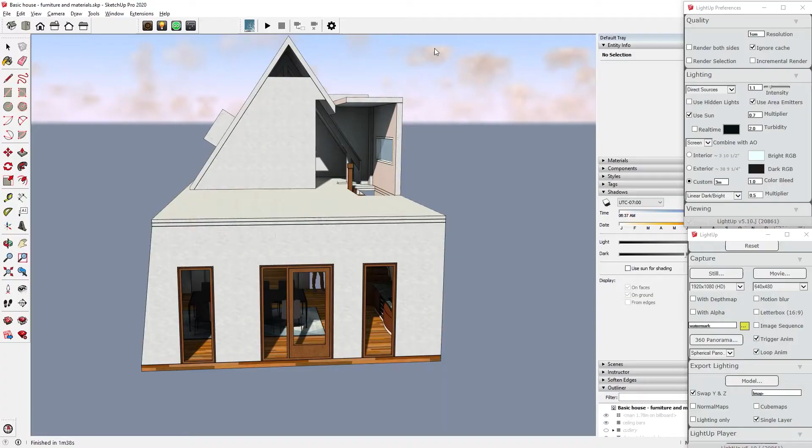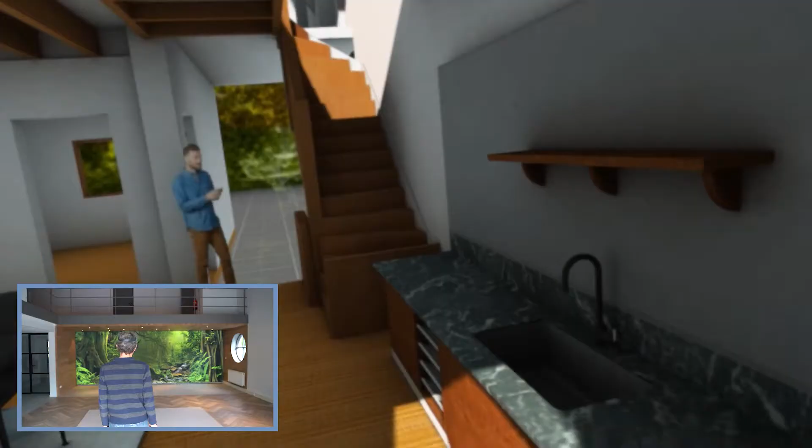In our first VR tutorial, we saw how you can add realistic lighting and shadowing to a model of a house in SketchUp. We then uploaded it to Sketchfab, a 3D model sharing website with a VR viewing option built in. So with a wireless VR headset like the Oculus Quest, you can walk through your room design and get an impression of its space.

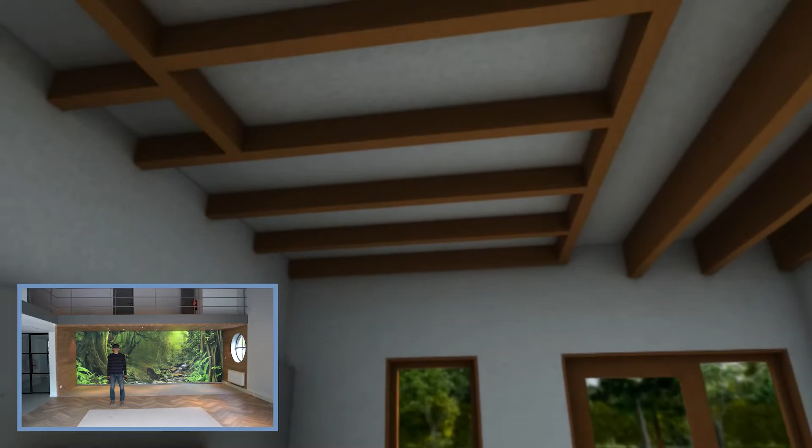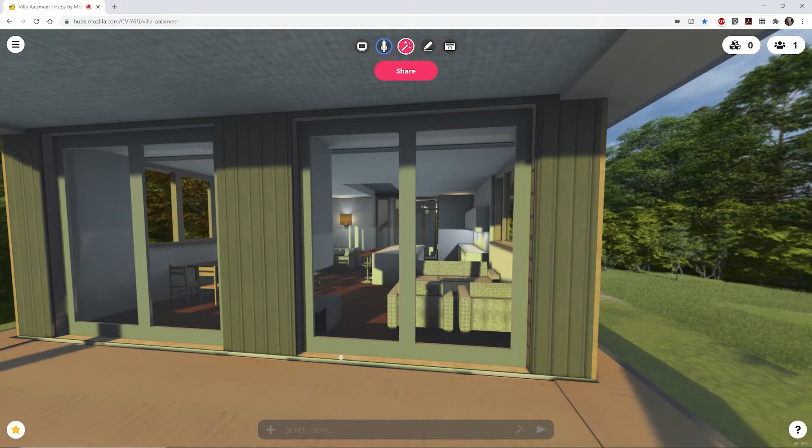To work with larger 3D models, like the ones created using BIM software such as Revit and ArchiCAD, we'll need a different tool to bring them into VR, as Sketchfab's VR performance is too slow for larger models. In this tutorial, we will introduce another free web-based VR system called Mozilla Hubs, which can better process larger models. We will also show you some light mapping techniques that are needed for these larger and more complex 3D CAD models.

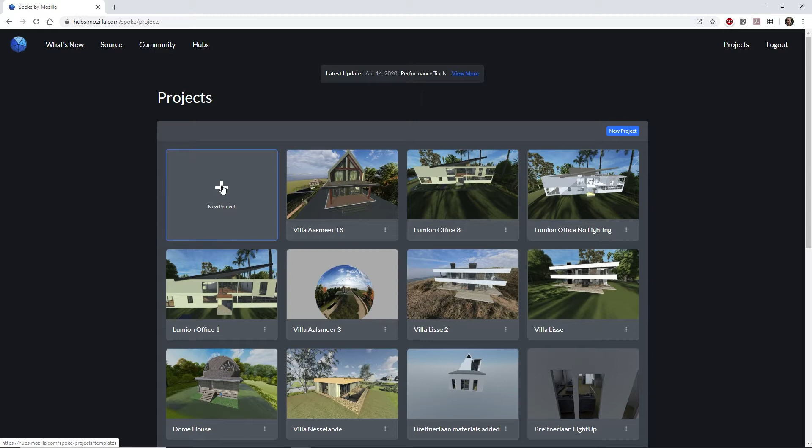Once we're in, let's start a new project. In Mozilla, you start with a default environment called Crater. You can delete this environment by clicking it and using the delete key.

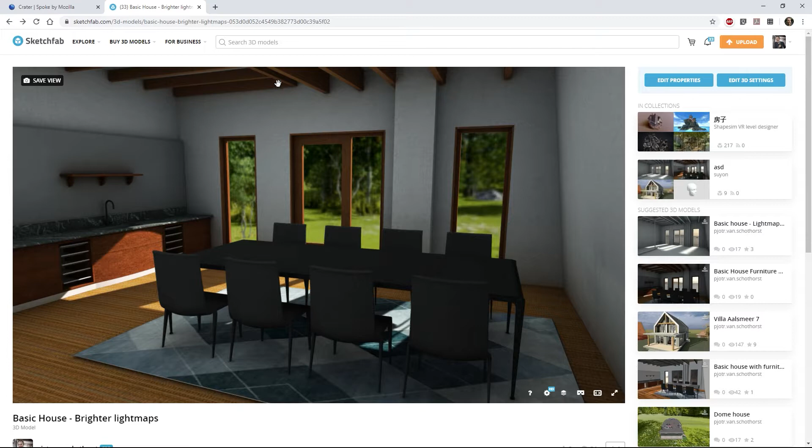Add a new model to the scene by dragging and dropping a model item into the viewport window. You can see at the bottom right-hand corner of the screen, the default model object has a URL associated with it. Delete this URL, as we're going to paste the URL of the house we made earlier in Sketchfab. Any object that you configured as downloadable in Sketchfab can be brought into the Spoke editor in this way.

We can't see the model at first because its size was set to a default of 0.01. Let's set the size to 1.

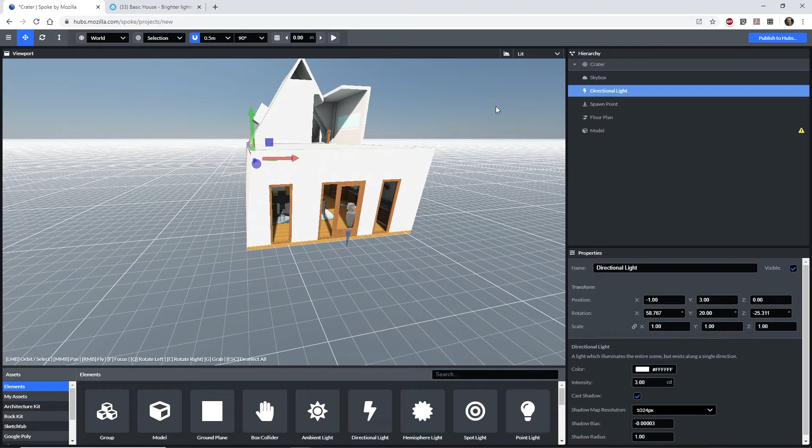In the top right section, you can see all the items that are part of the default new project. Since our house has its lighting baked into its textures, we can delete the directional light and add a hemisphere light. This will light up the scene more evenly.

Let's rename the project to Basic House. We can go ahead and publish our new project.

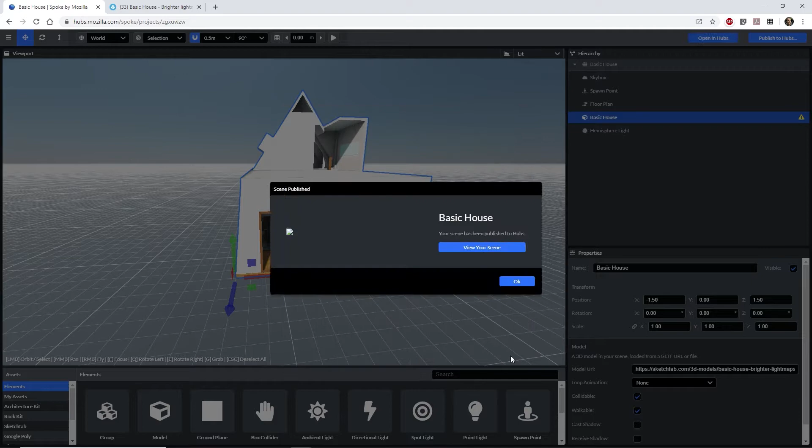All right, our project is published and we can now view the scene. Let's create an online meeting room within this scene and call it Basic House 1. Click to enter the room.

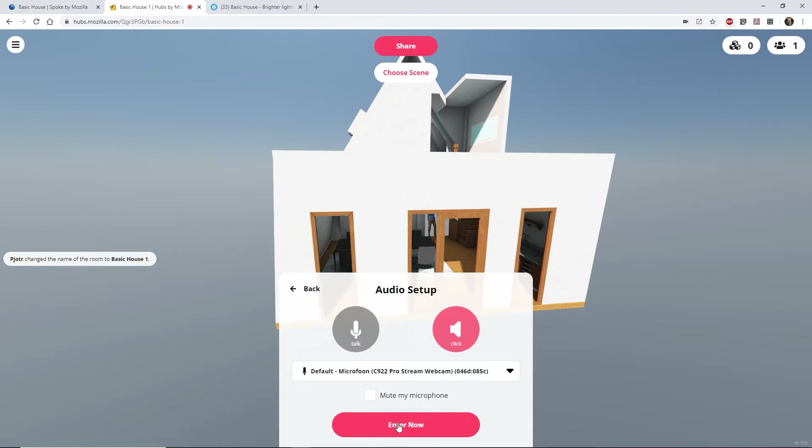In principle, everything is ready for our VR headset, but to improve the experience, there are several tweaks we're going to do first. We'll show you these in a bit.

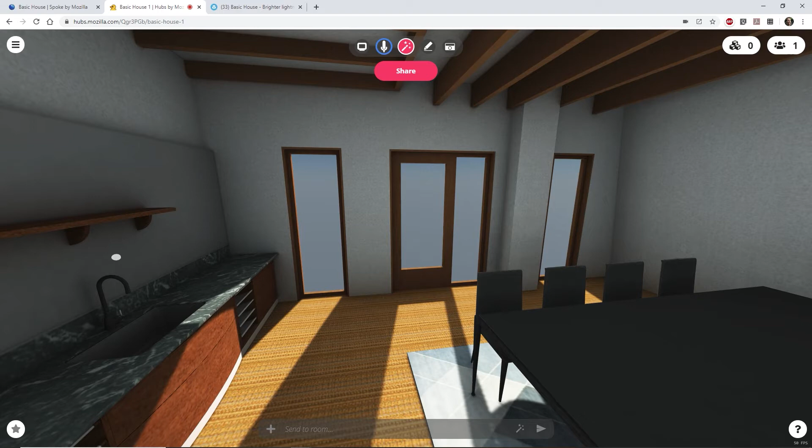First, let's take a look around our scene. Moving through the scene is like a first-person video game. This means that you can navigate using the W, A, S, and D keys, or the arrow keys if you prefer, combined with the mouse.

Holding the left mouse button lets you rotate and look around, while clicking the right mouse button instantly teleports you to the spot where you clicked. You can also invite other people to join you and check out the project.

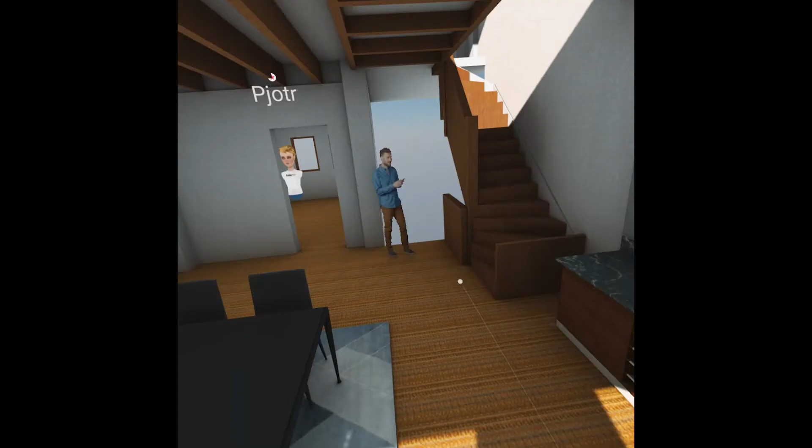All they need to do is use the project's unique URL or temporary code in a browser, including the browser that you access inside a VR headset like the Oculus Quest. When another person enters the room, you'll see them added to the group icon at the top right corner. If the person entering the room is wearing a VR headset, you'll also see their hands, which correspond to the headset's controllers. Now then, with that quick tour done, let's improve our experience while in VR.

Here's a view that we recorded while using the headset. The first thing that you might notice is that our eye level is too high. You can tell that the eye level is too high because when you try to touch the ground with the controllers, you'll see that you can't actually reach it. It almost looks as if we're on an invisible ground plane that is floating above the visible floor level.

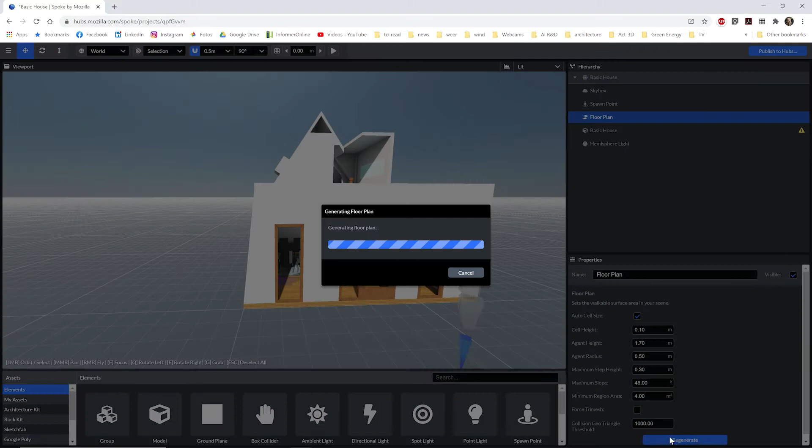To understand why this is happening, we need to go back to the Spoke editor. And if you look at the model properties at the bottom right, just below the URL, we can see that our model has the options of collidable and walkable. These settings will be very important moving forward. Click on the floor plan from the hierarchy list on the right. Then on the bottom right, click Regenerate. This will show the area where we can walk, as well as the objects that we can collide with while walking through the VR scene.

These yellow lines show the collision boundaries throughout the house. This is called a collision mesh, and it was created from the objects in the scene that have the walkable and collidable options active in their properties. Another option is agent height, which you can set to your own height and eye level. The default collision mesh for our scene looks okay at first glance. Let's click on the Regenerate button. This is something you need to do whenever you make a change in the properties or when you set a mesh to be collidable or walkable.

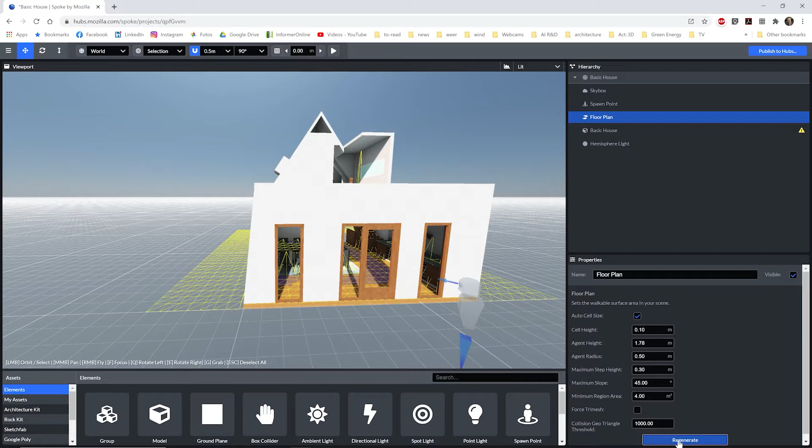Upon closer inspection, we can see a blue transparent plane floating above the yellow lines on the floor, which seems to correspond with the floor level of the real-life room that you experience when walking in it with a VR headset. There's no way to lower this plane, but we can get around this problem if we generate the floor plan's collision mesh with an invisible copy of the house shifted 40 centimeters lower, in combination with a visible copy of the house that will have the options walkable and collidable turned off.

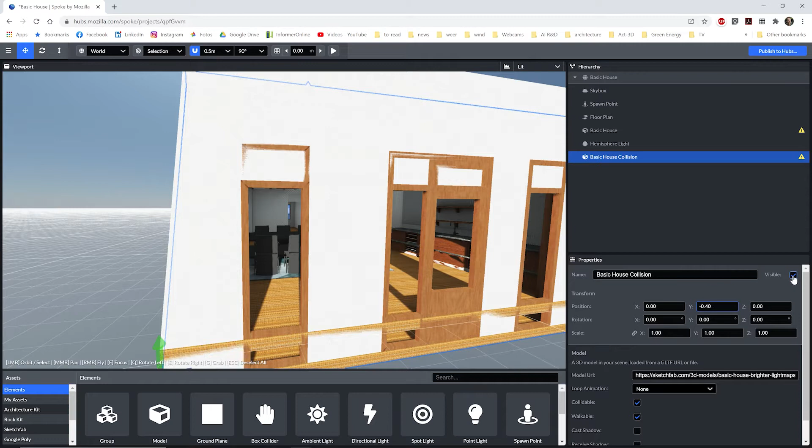The exact difference between the visible house and its collision mesh can differ based on the house design, and trial and error is often the best way to determine this number. It is also based on the accuracy of the boundary area height set by the Oculus Quest. To create the invisible and visible copies of the houses, let's add another model item into the viewport, and we'll give one of the houses a y-axis of minus 0.40, while the other house's y-axis will be 0. For the lower copy of the house, we'll keep the collidable and walkable options on, but then uncheck the visibility box. We'll set the house model at the higher position to visible, and we'll turn off the walkable and collidable options.

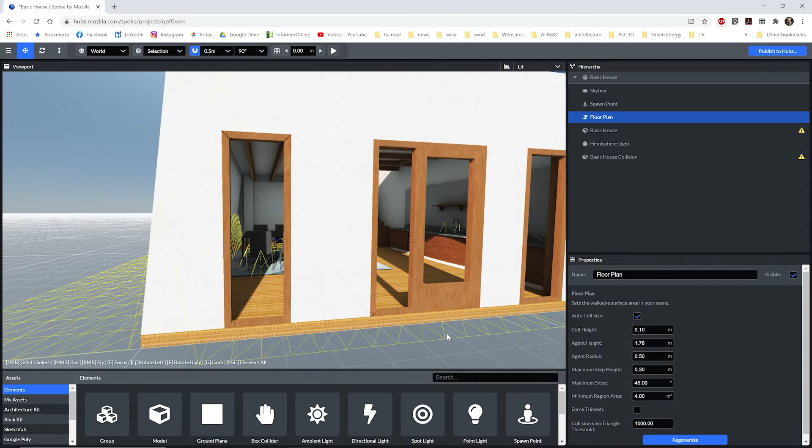Another way of achieving the same goal would be to add a simple custom-made object into the project. For example, you can make an object with only the house's floors and stairs using your 3D modeling tool. And when you add the object to this project, it should be the only object with walkable and collidable options turned on. This will not only improve the performance of the VR experience, but it will also make it easier for people to walk through the house without bumping into furniture objects.

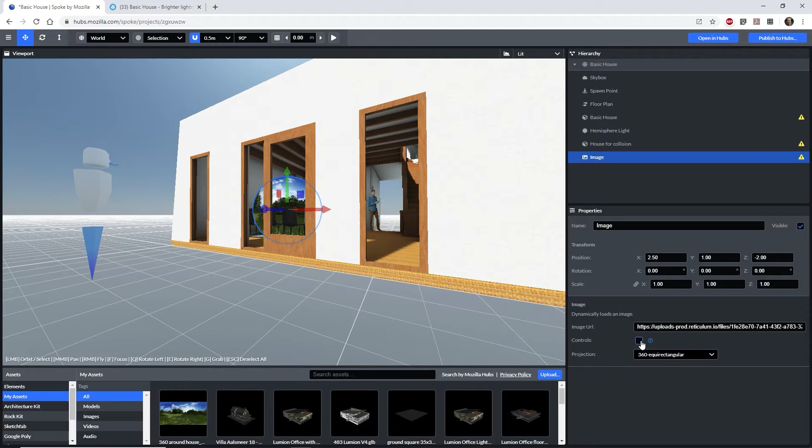Now that our height is set, another thing we're missing in the scene is a nice looking background. Luckily, we can create one quite easily by dragging a 360-degree image into the scene. To do this, untick the Controls option and set the projection to 360 equirectangular. Increase the size to 50 and rotate it so that it fits better with the light and shadows in the house. And lastly, we're going to want to walk around the house, so let's add a ground plane that's wider than the building's exterior walls.

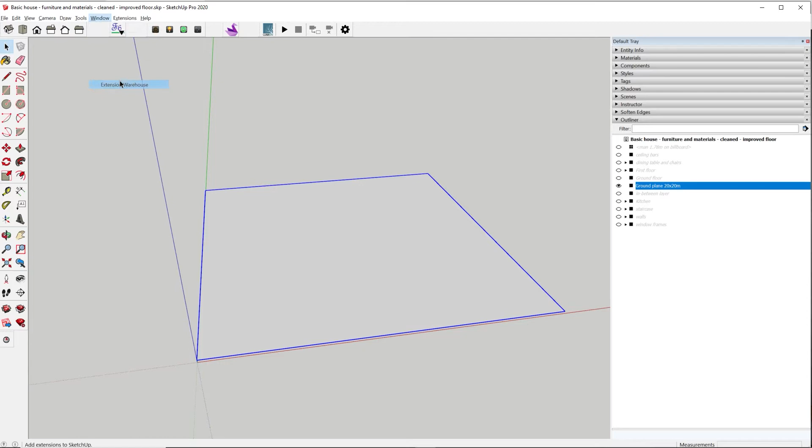We'll first need to go back to SketchUp and create a plane that's around 20 meters by 20 meters. Make sure to save the plane in a GLB file format, a relatively new file format seen as a successor of Collada. While GLB files are not widely used in the CAD industry, it is the only 3D format supported by the Spoke editor in Mozilla Hubs. So in SketchUp, you will need the GLB export plugin that's available in the SketchUp extension warehouse. You can find a link for this plugin in the video description.

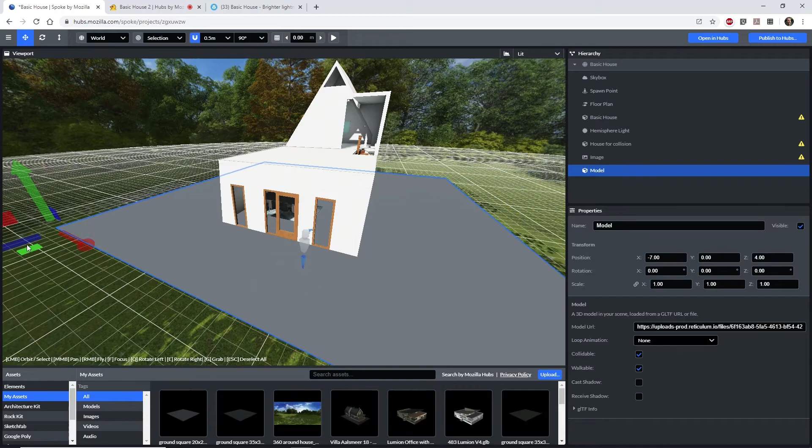Once you have the square plane saved as a GLB file, simply drag it into the Spoke editor. It will appear in the section My Assets and in the Scene Viewport. We will use this square plane as a collision object. To show a nicer ground plane, instead of this blander gray, we rendered a top view image of a meadow in Lumion, saved as a PNG file. We then used Photoshop to fade the image's edges and dragged it into the scene.

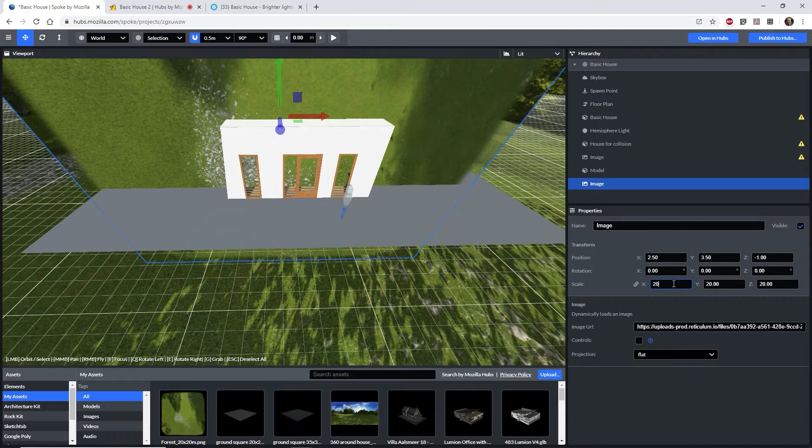Untick the Controls option, keep the projection flat, increase the size to 20, and rotate its x-axis to -90 degrees. Finally, align the image to our newly added square plane. Select the square plane again, adjust the y-axis down by 30 centimeters, and set it to invisible. Regenerate the floor plan and publish the project again.

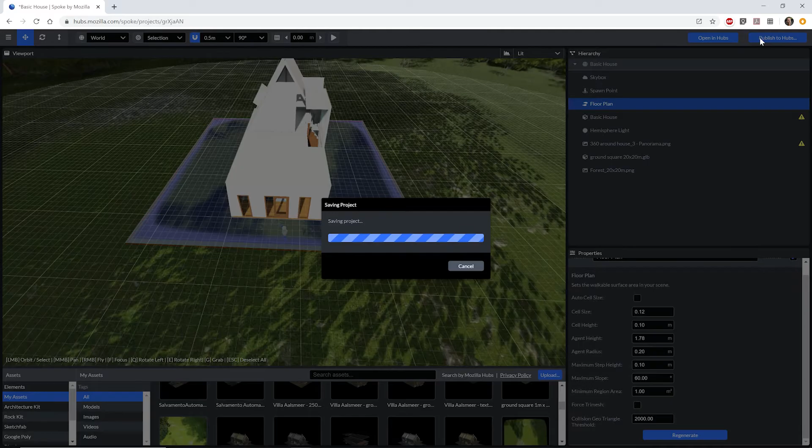Now, when we enter the room, our eye level looks a lot better. We're no longer floating in the air, and we can touch the floor with the VR controllers. They actually seem to touch the ground.

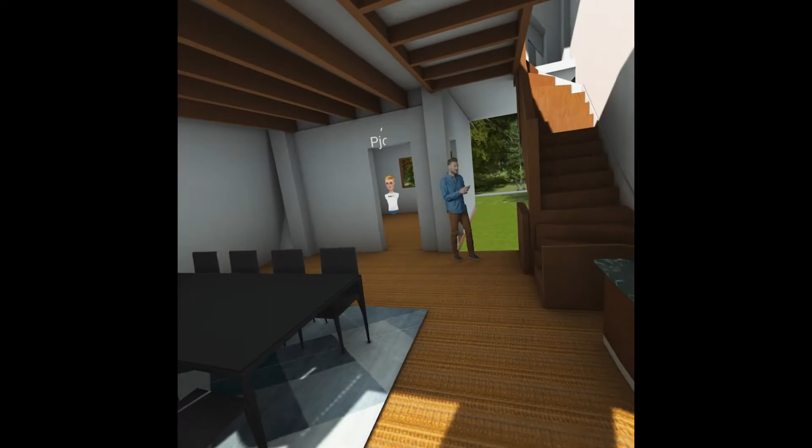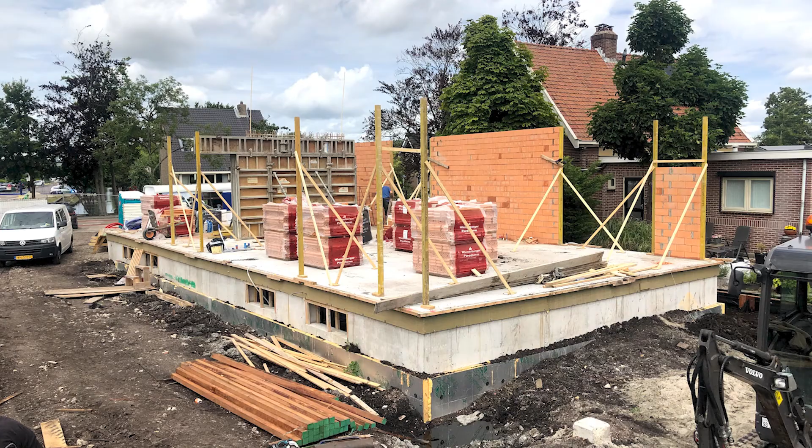With these tweaks out of the way, we're going to move on to a more interesting and complex CAD design. This house was designed by Dutch architect Paul Spaltman, and it's being constructed right now at the time of making this tutorial. Paul used ArchiCAD to design the house and later exported it to SketchUp. Let's have a look at the model as is, and without lighting from the LightUp plugin.

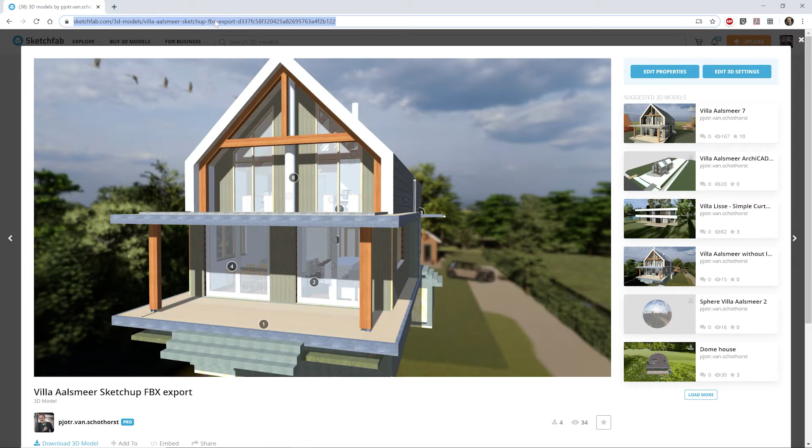And because it seems the GLB file exporter doesn't work very well with Pjotr's model, we're going to first export it to Sketchfab, set it to downloadable, and then get it into the Spoke editor using the same method we used with the basic house earlier in this tutorial. Here's the house in Mozilla Hubs. Without any lighting, the house doesn't look very attractive, and so that's where we're going to start.

Back in SketchUp, we can see that the model has some useful layers, or tags as they're now called, as well as a large number of unnamed groups in the SketchUp outliner. Because the LightUp plugin uses groups to create light map textures, we need to create meaningful groups manually.

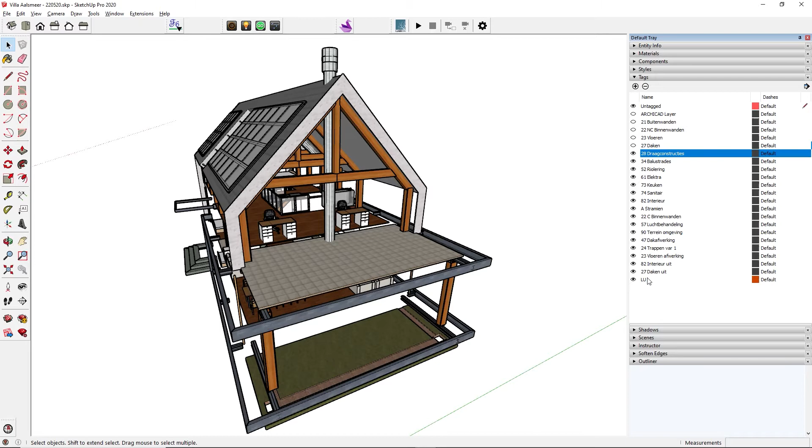We also need to delete all doors to make the house easier to walk through, and delete all transparent surfaces as they can lead to strange visual effects in the walkthrough version of the house. This may feel like a daunting task, but it only took 23 minutes for this specific house design. Here are the groups that we created for this house. Now, let's light it up with the LightUp plugin.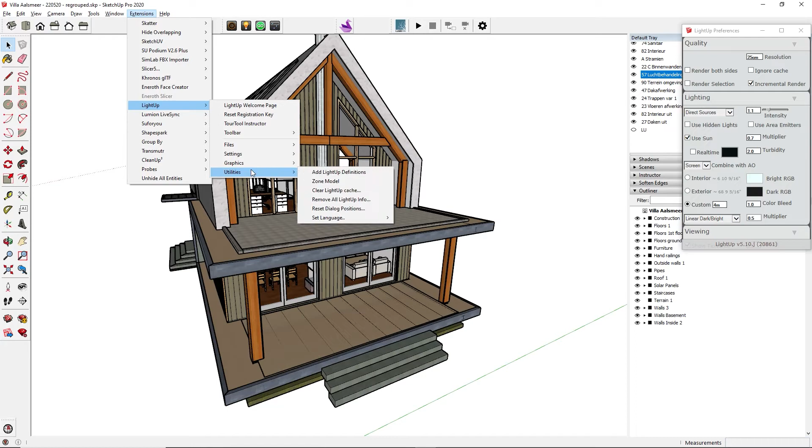On our first try, we didn't really get what we expected, so we cleared the LightUp cache, removed all LightUp info, and exited SketchUp while LightUp was still active. Back in SketchUp, we clicked on Go in the LightUp plugin, and now the lighting looked a lot better. Remember, after a hard reboot of LightUp, you'll need to choose the right render settings again in the LightUp preferences: ignore cache, use sun, not real time, and custom 3 meters.

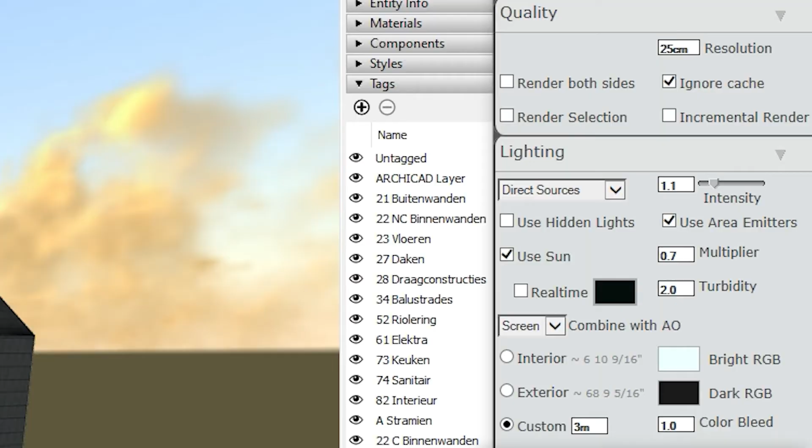Once we see the better lighting when rendering at a 25 centimeter resolution, we can then render it at 1 centimeter resolution to get a lot more detail. And thanks to the low sun position, the main rooms are really nicely lit. But over here, we can see that the bedrooms and the basement are too dark. There also appears to be some missing walls and ceilings in the basement.

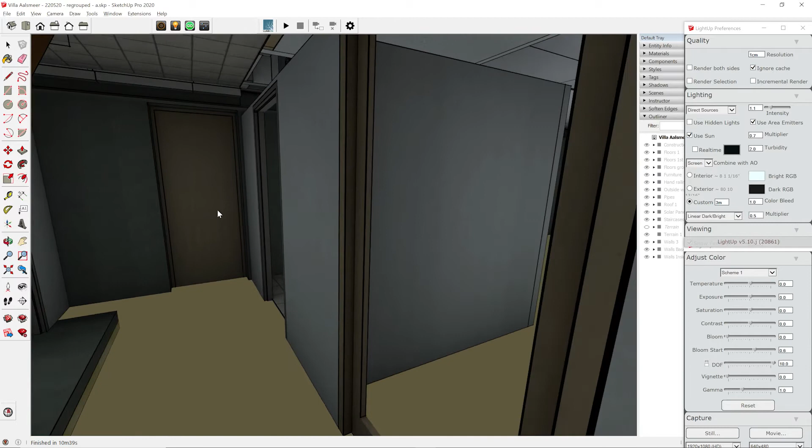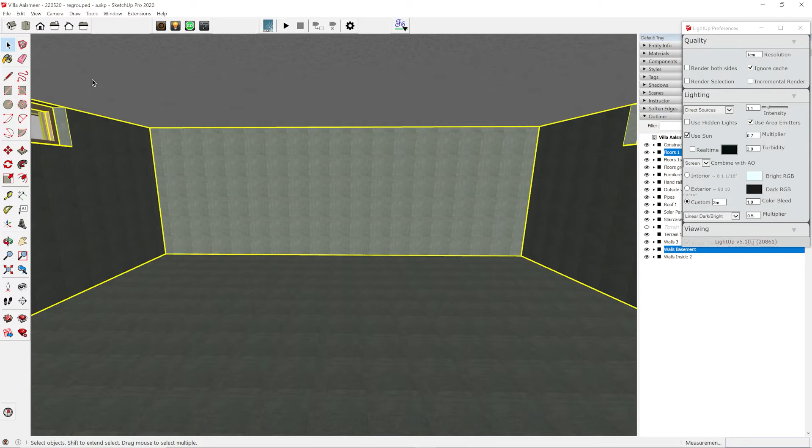It looks as if the surface of these two planes are transparent and that we are looking at the inside of the wall. The face orientation is wrong, but this is an easy fix with the Auto Reverse Faces function of the FredoTools extension. With this extension, simply select the incorrect surfaces and perform the Auto Reverse Faces function. We rendered it again and everything looked a lot better.

Another thing we did was replace a few of the dark walls and ceilings with white materials, using a texture that was just 1 pixel in size. And here's the lighting after.

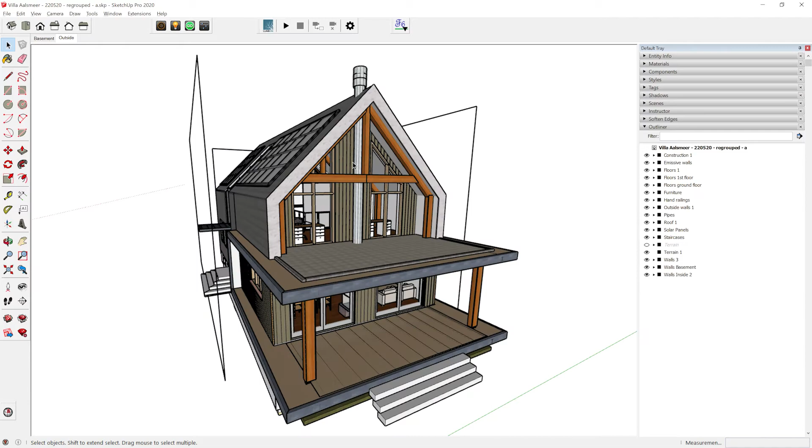There are 2 ways to improve the lighting and shadowing in SketchUp so that you get a better result with the LightUp plugin. The first is to add emissive planes outside the building so that the light comes in through the windows. The second way is to add lights to the ceiling and walls on the inside of the building. Both methods have their pros and cons. First, we'll try the emissive planes method.

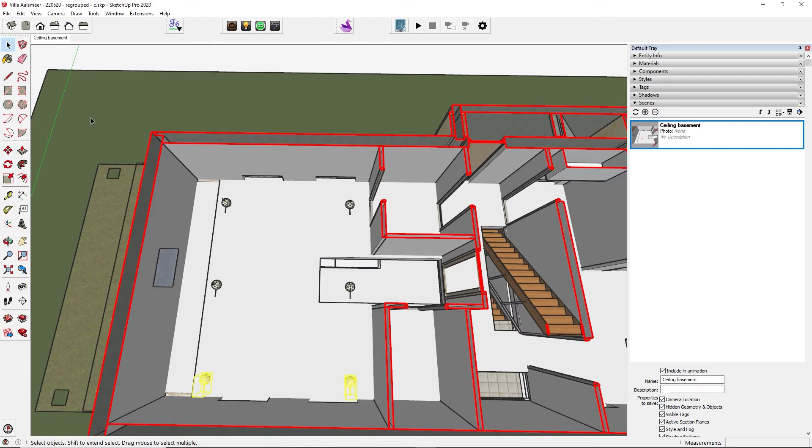Place large squares outside of the house and next to the windows that are not lit up by the sun. Click on the little light bulb icon. Press the Alt key and left-click on the new squares. A dialog box pops up called Material Properties. Tick the emitter box and leave the other properties as they are. Let's render again at 1 centimeter resolution.

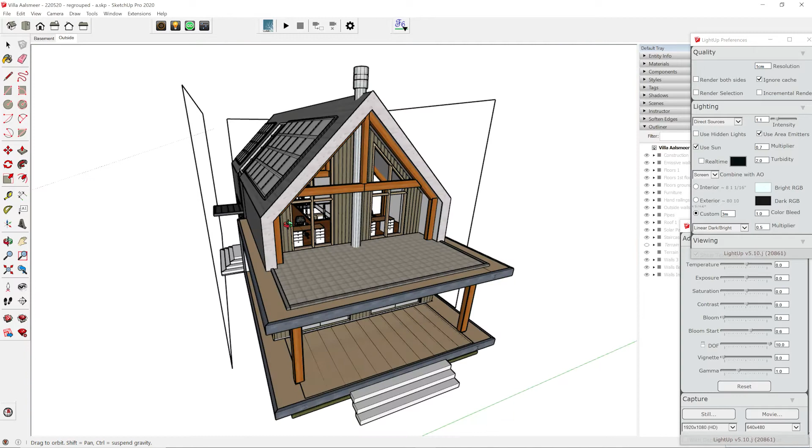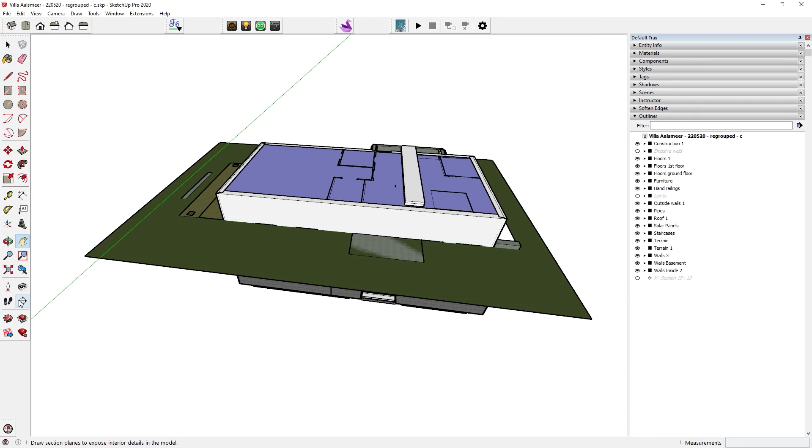As you can see, we now have some very bright lights coming in from the outside of the building. Let's look inside the basement. There's a lot more light in there too. While the lighting looks better overall with the emissive walls, you can see there are still some unnatural shadows. So let's try this second lighting option and add lights inside the house. One way to place lights on a ceiling is to turn the house upside down and add a horizontal section plane.

To place a light, click on the light bulb icon, then click on the ceiling. After placing the light, you may need to reposition it. We can use SketchUp's standard tools for positioning lights, making additional copies, and grouping them.

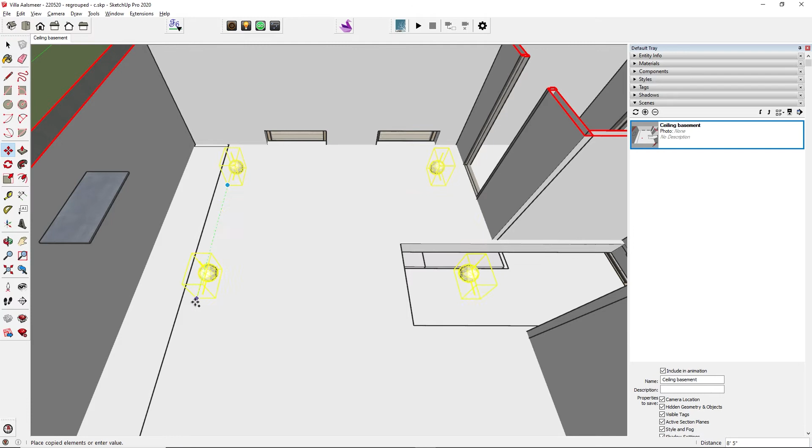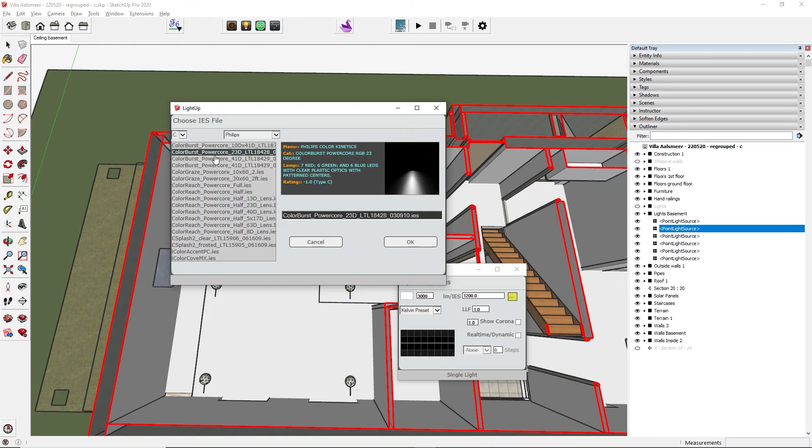To set the lighting properties, click on a light with the light bulb icon selected. A dialog box pops up that lets you select an IES profile. Now, these are industry standard light profiles. Most light manufacturers provide IES profiles for their products, and you can download these profiles by searching online for IES light profile. LightUp includes 2 sets of manufacturer profiles, and you can always add your own. Browse through the profiles and select one that fits your taste.

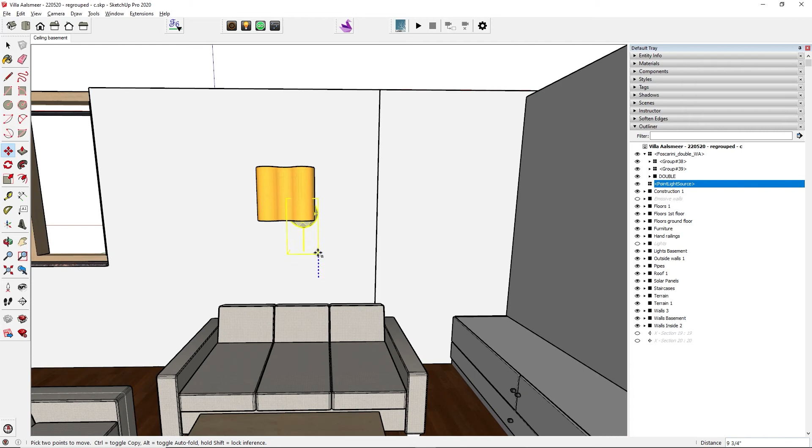To check the light, we rendered a test at 25 centimeters. It's looking pretty good, so we're going to place lights in the other rooms in the same way. For lights on walls, we can use a light fixture object and place point lights inside of it, which is also a default feature of LightUp. Make the material semi-transparent, and let's see how that looks by clicking Go in the LightUp plugin.

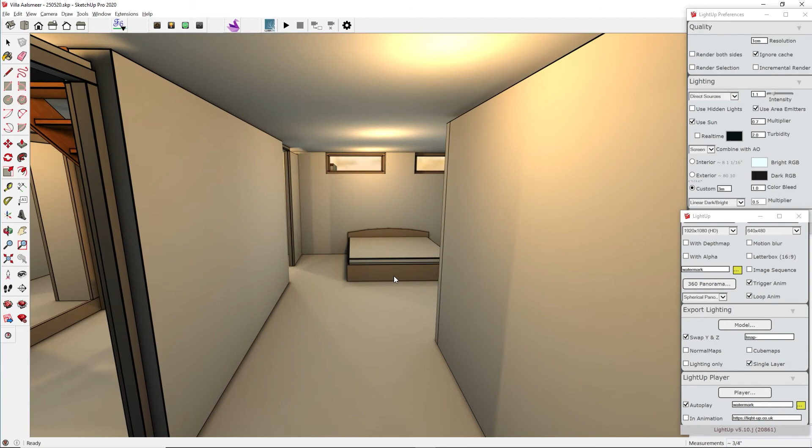For easier placement, we can make a SketchUp component of this set and place another one on the far wall. Let's render again at 1 centimeter. This time, the rendering took 25 minutes, but when it was finished, it was time to fly through the house. Looks pretty good. Next, we'll export the LightUp model as an FBX file.

And to get the FBX file and its light map textures into the Spoke editor, we need to convert it into the GLB format mentioned earlier. Luckily, one easy method is to import the FBX file into SketchUp again, and then use the GLB export extension. To best import FBX files into SketchUp, we tested a few SketchUp extensions. We landed on one tool called Transmutr.

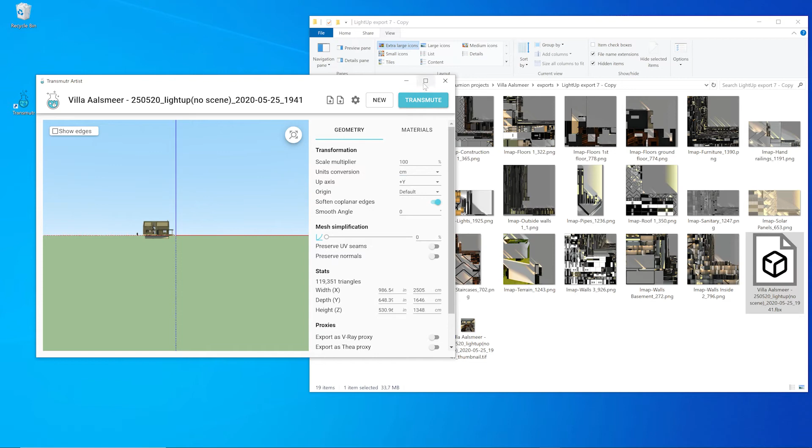This extension lets you import files from various formats and then perform some basic operations, such as setting the vertical axis and the scale, manipulating the materials, and reducing the number of triangles before saving them in the SketchUp format. In our case, we only set the orientation and scale. Transmute the file in SketchUp format, open it in SketchUp, and export it into the GLB format.

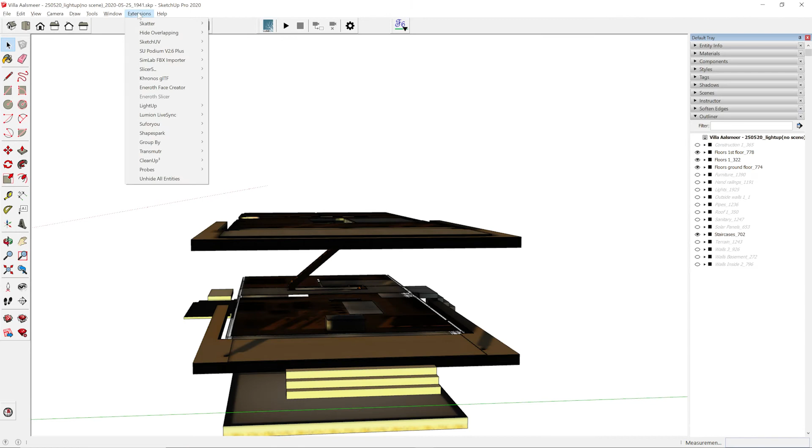Now, we need a model to set the collision features in our VR environment by selecting only the floors and stairs. Hide all layers apart from the floors and stairs, and then export these to GLB as well. It's time to bring everything together and finish creating our VR experience. Let's go through the steps together. First, drag the GLB file of the full house into the Spoke editor.

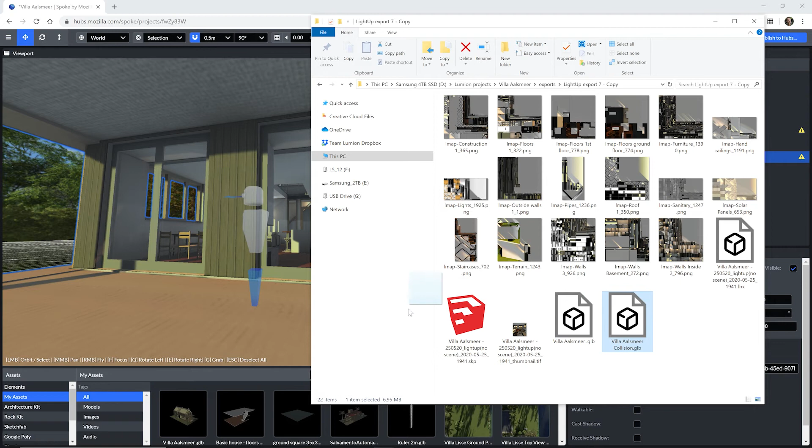Then we'll do the same with the model that we made for collision. Set the size and position of these two models just like we did at the beginning of this tutorial. Make sure that the collision model is invisible with walkable and collidable options turned on. And make sure that the full house model is visible with walkable and collidable options turned off.

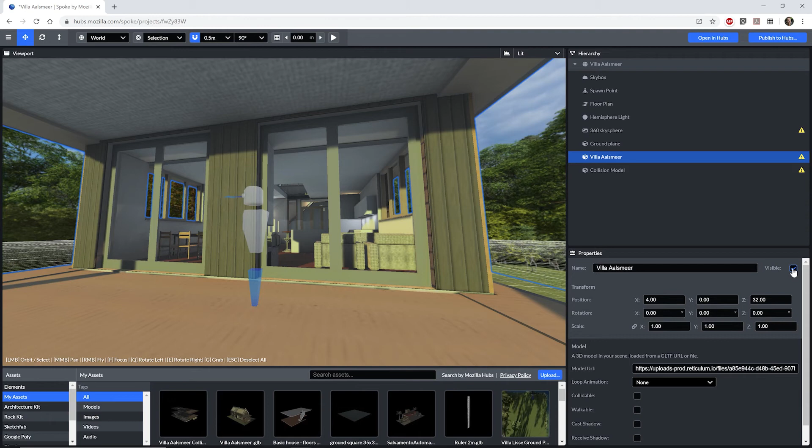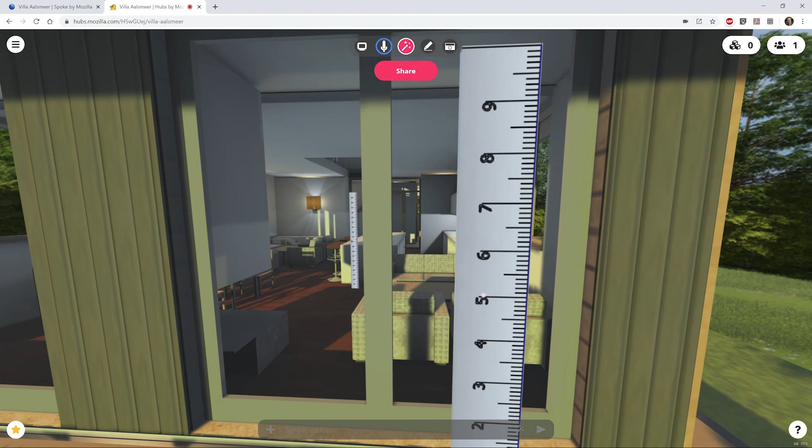To adjust the floor level correctly, we created a yardstick object at the correct scale and placed a few of these throughout the scene. Create the floor plan and publish the scene to Hubs. And first, we're going to walk through the house with a PC. Share the scene to get its link and code so that you can easily access it while wearing the VR headset.

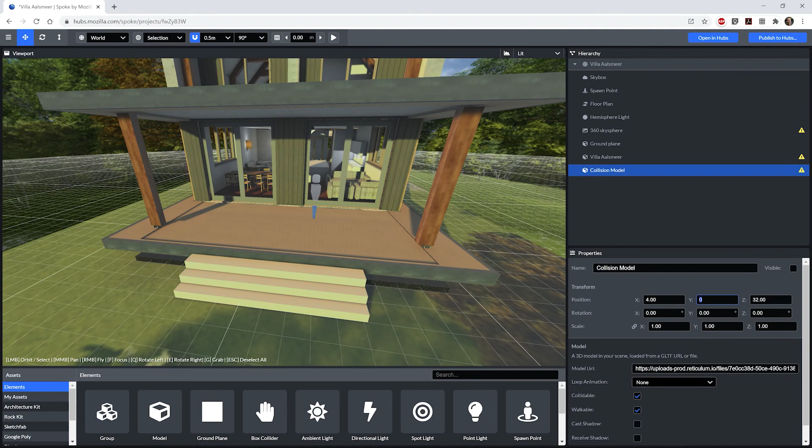Now, let's check the floor level with the Oculus Quest controllers. The collision level is 10 centimeters too high, so we need to go back into Spoke, set it lower, and republish the scene to Hubs. Once you are happy with the house in Hubs, you can invite other people over for a virtual design review meeting or just for a social gathering. All you need to do is send them the link.

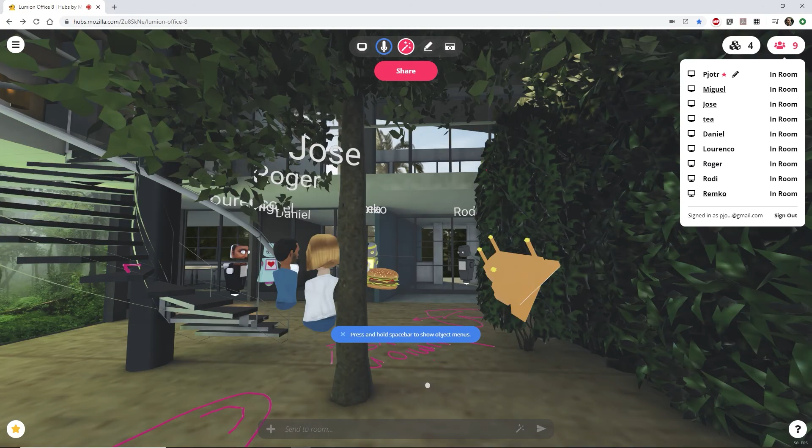People can change their name when they enter a room by choosing Set Name and Avatar in the top left corner. Here's a recording of a social meeting we held in our virtual office. As you can see, we got a little carried away with all the interactive features. Here, you can see the impact that good lighting can have on a model in Hubs.

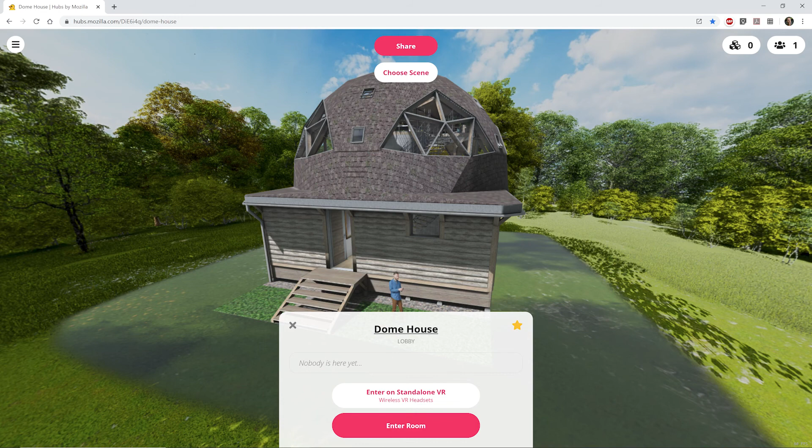To test our workflow, we created some other VR walkthrough environments from designs made in Vectorworks, Revit, ArchiCAD, and SketchUp. We've left these online for you to explore.

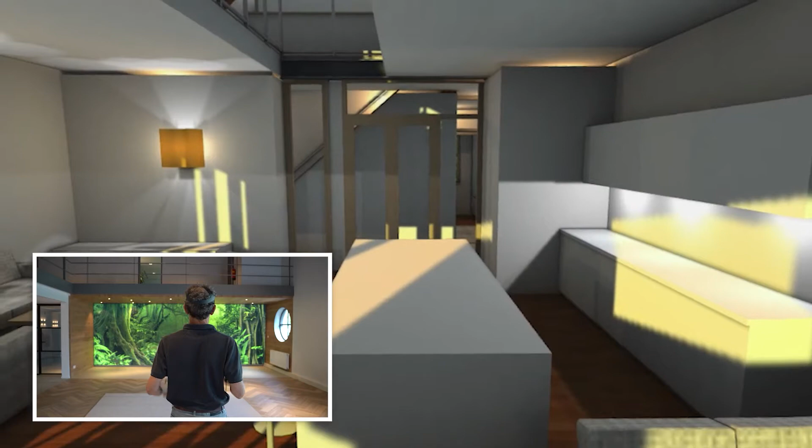VR walkthroughs are a great way to review a design for yourself or with other stakeholders, allowing everyone to get a good grasp of its dimensions, or just for a fun social get-together with friends or colleagues.

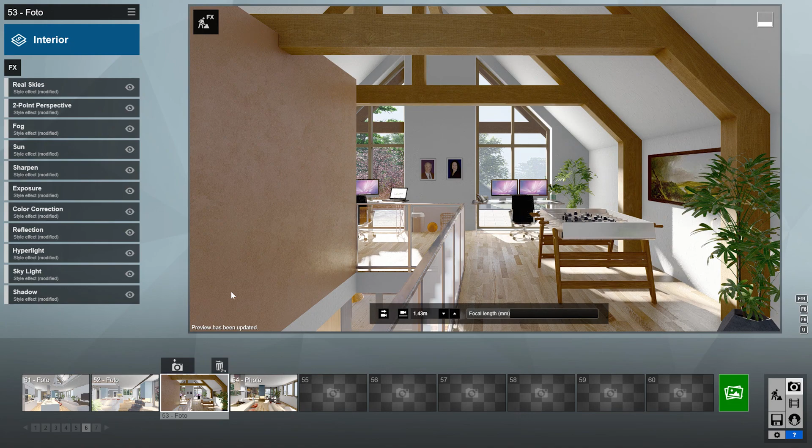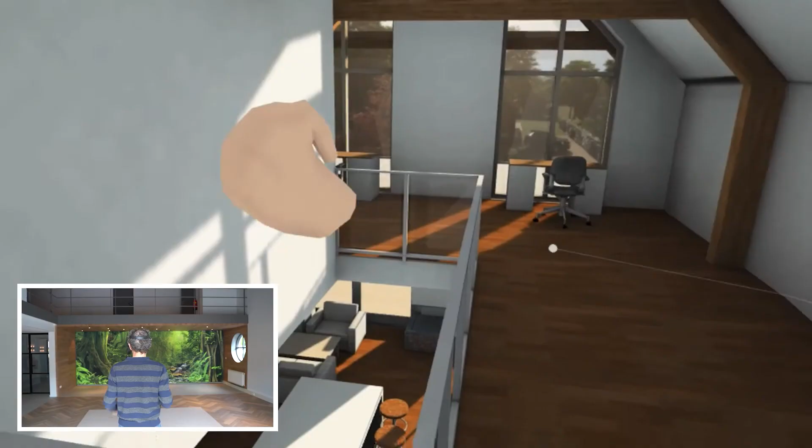This concludes our second tutorial on free, web-based wireless VR walkthrough solutions for architects.